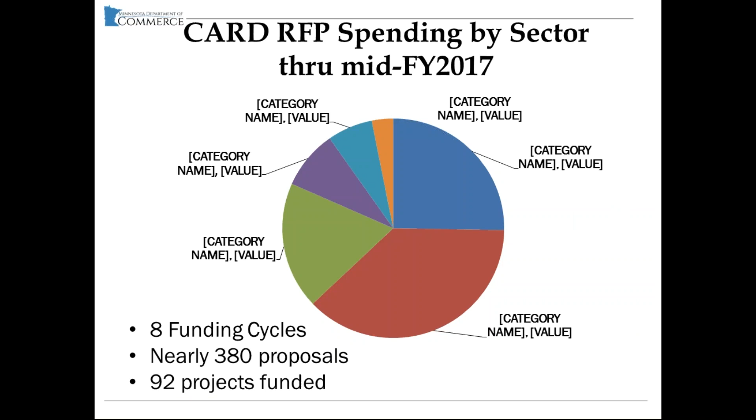With the topic at hand, condensing boilers, for all of us who are excited to do some technical learning, or geeking out as we might like to refer to it, today's topic is on condensing boilers. Condensing boilers are one of the most promising natural gas technologies for reducing commercial energy use in Minnesota. However, many newly installed systems only achieve a fraction of their expected energy savings. Boiler equipment and controls are often based on standard operating conditions, which are different than the conditions needed to perform ideally, and modifications may be needed to achieve optimal performance.

The Center for Energy and Environment recently completed a field study on the impact of actual operating conditions on condensing boiler efficiency in Minnesota commercial buildings. The research identified opportunities for significant savings from temperature control settings and optimization and other low-cost upgrades.

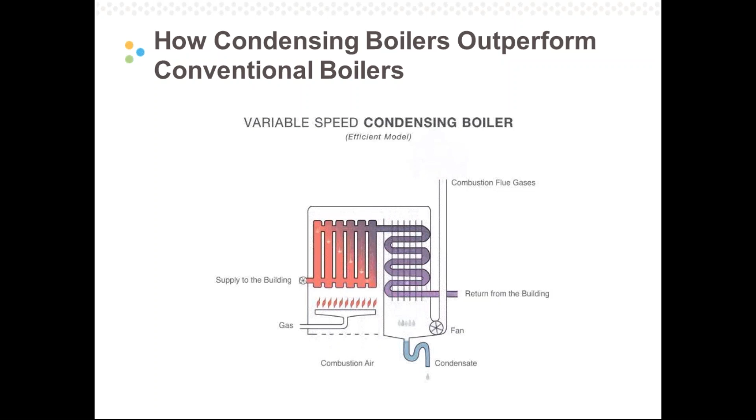There's quite a bit less steam coming out as some of that water vapor is condensed, and the heat from the condensation of that water vapor is captured and then used within the heating system.

So condensing boilers have the benefit of capturing some heat from that steam or hot water vapor, and they don't have the safety factors that cause inefficiencies in conventional boilers.

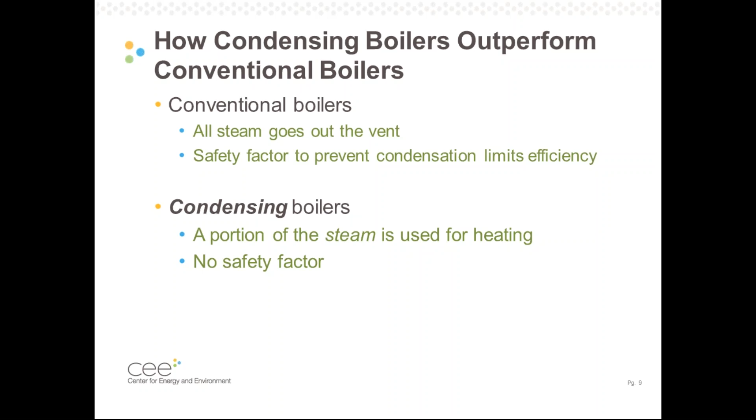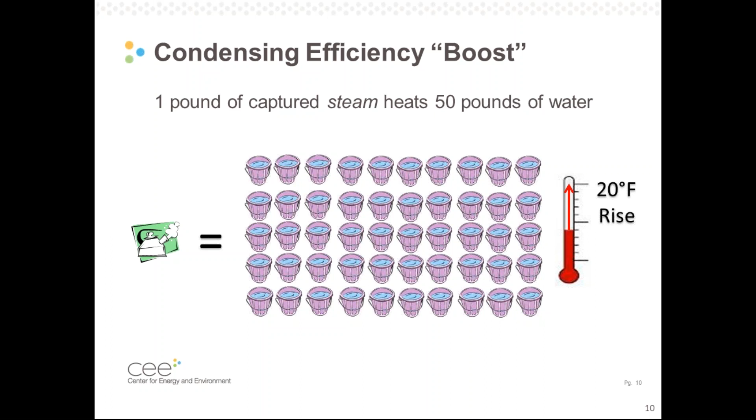Even though that water vapor is not a high volume, it carries a great deal of energy with it. One pound of steam or water vapor that's condensed can heat 50 pounds of water by 20 degrees, and that's in a typical boiler design. They would be heating water by 20 degrees, so you get a lot of bang for your buck in capturing that condensation.

Looking at the benefits of condensing boilers over conventional boilers: a conventional boiler, typically you're not going to get over 81, 82% in terms of operating efficiency, and more typically you're going to be in the 80% range.

The orange here is showing at the top conventional boiler efficiency, and then the next two bars show the range of what could be achieved with a condensing boiler, and what you actually achieve is based a lot on what the operating conditions are within the building.

If you have poor operating conditions for a condensing boiler, you're going to get the minimum savings. You're going to achieve an efficiency of around 86, 87% under any conditions.

Under ideal conditions, you'll get something more like the rated efficiency of the condensing boiler, and that's going to vary from model to model, but it could be up to 96% efficiency or even a little bit more. So in any situation you're getting some savings, but depending on operating conditions, you can get a lot more savings than the minimum.

In terms of what's happening in an actual building, it's kind of a question mark in a lot of cases in terms of what's actually achieved.

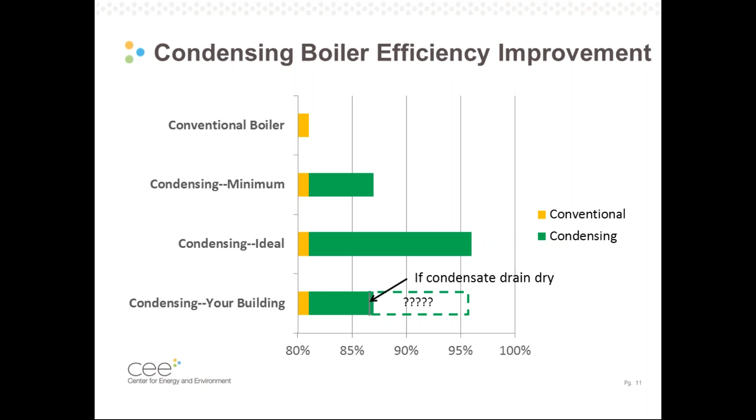I know that there's a lot of utility programs promoting these condensing boilers, and there's been a lot installed, and there's variation in terms of what people are seeing for actual performance and savings.

The most important factor in getting the best performance and energy value out of a condensing boiler, just like in real estate there's 3 rules of value - location, location, location - when it comes to performance of condensing boilers, the 3 most important rules are getting a low return water temperature coming back to the boiler: a low return water temperature, a low return water temperature, and a low return water temperature. It makes a huge difference.

It's not necessarily the temperature going out of the boiler to the building, it's what comes back into the boiler that makes a big difference, so that there's water cool enough to condense the water vapor out of the combustion gases. Kind of like on a hot, humid day, you have a cold can of pop, it will get condensation on it. You have to get it down to a certain temperature to really get that condensation happening.

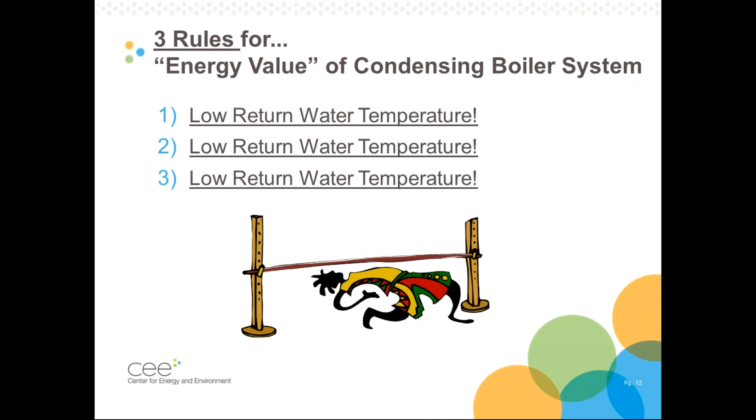This shows an example plot of efficiency ratings for a model of a commercial condensing boiler. You can see for this particular one, they're talking about achieving a 90% efficiency rating under conditions where it can't condense, over on the right. And then as the return water temperature goes down further and further, you get the efficiency going up dramatically.

One thing I also want to point out is that condensing boiler performance is often oversimplified, with people asking just whether it's condensing or not. That's roughly at the 130 to 120 range, which is just on the far right hand side of when it's starting to really ramp up.

So it's not just whether it's condensing or not, it's how much it's condensing that makes a big difference. As it starts to condense, you get a little efficiency gain, but there's still a long range to go that makes a very big difference. It's not just a yes or no question - it's a lot more complex than that, with a lot more energy implications depending on how far you go.

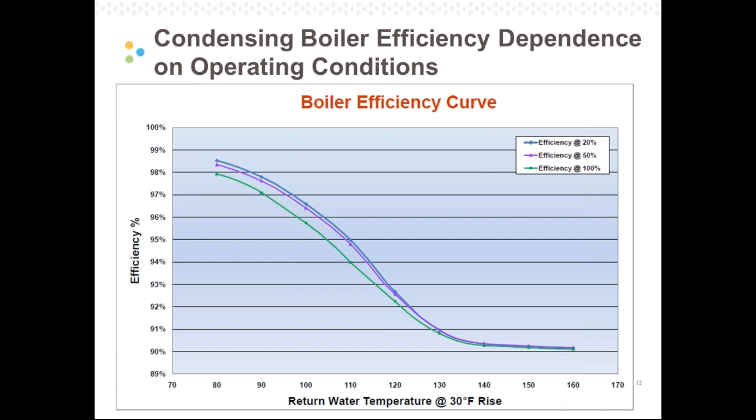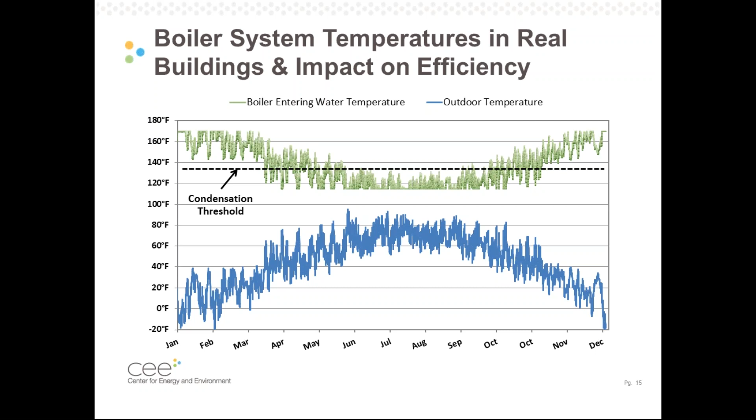This next slide shows how in the design of a system, besides the impact of the building and the system controls on the return water temperature coming back to the boiler, you can also get efficiency benefits by changing the water flow rate in the system.

This is generally done using a variable speed drive on the building loop pumps, not just on the boiler itself. In larger buildings, there tend to be separate pumps for the boiler and separate ones for the building loop. If you're running at a typical flow at design levels with the right design, you might have a return water temperature of 125 in this example.

But with that same system, if you slow down the flow, you actually increase the temperature of the water going out of the boiler - if you look at the right-hand part of that bar labeled low flow, it's actually a warmer temperature coming out. But at low flow, you can have a lower temperature coming back and still get the same amount of heat out of the radiators or air handlers, whatever the heat delivery device is. So you actually get an increase in energy performance by lowering the flow, besides the reduction in pump energy use.

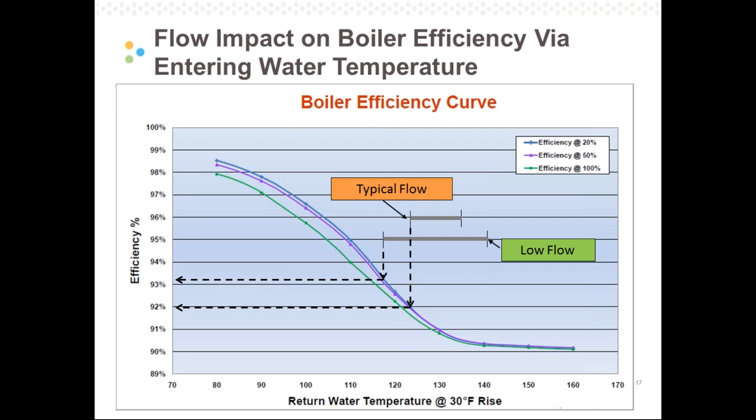Now I'm going to talk about another operating condition factor that can impact boiler efficiency, though not as much as temperature - that's excess air, addressed by a traditional boiler tune-up. That's just adjusting the mixture of natural gas and air to get the right proportions to operate most efficiently without producing carbon monoxide.

This shows one measurement of how well the tuning is, in terms of the amount of excess air. In this example, there's 20% excess air, which is a fairly low value and indicates a pretty well fine-tuned boiler. If the boiler isn't tuned quite as well and you have 30% excess air, you can see that the efficiency level drops.

Drops in this case, even at the same return water temperatures, you end up with a lower efficiency level at the higher excess air, and then that effect is even more dramatic if you have higher excess air.

So you see a significant change with the tuning, and this makes condensing boilers even more sensitive to having correct tuning than conventional boilers, because besides the extra temperature difference, when you have excess air, that extra air gets heated up and goes out the chimney without doing any good.

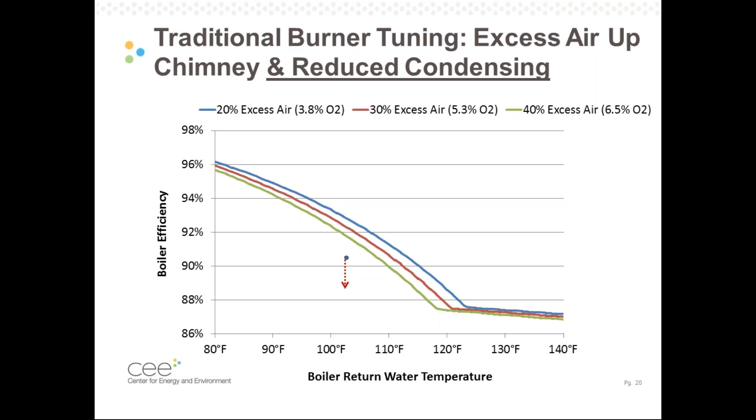Besides that factor of extra heat out the chimney, you're reducing its ability to condense, because the water vapor in the combustion chamber gets diluted by the extra air, and then the dew point goes down. It makes it harder to condense that water out of the vapors.

Now that's given a brief background on some of the key operating conditions that affect condensing boilers. Going to talk about what we specifically did for this project to try to evaluate the impact and the potential for CIP programs to try to increase the impact of what's happening with condensing boilers in Minnesota.

We started out by doing a preliminary market study, talking with local industry contacts to find out what different variations people are seeing in condensing boiler installations, what kind of buildings they're going into, and based on that information, we picked sites for doing detailed monitoring.

In the monitoring analysis, we picked a dozen sites representative of three different commercial building types: education, multifamily buildings, and government or office type buildings. Those seemed to be where condensing boilers were a little bit more prevalent, and we wanted to get a range of conditions and systems.

We also looked at a range of boiler system sizes and other characteristics that vary from building to building. We also did an industry survey towards the end of the project to get feedback on potential program improvements based on our findings, and to get a better sense of what people see as problems in the industry and how things can be improved in terms of condensing boiler performance. And last of all, we have done dissemination.

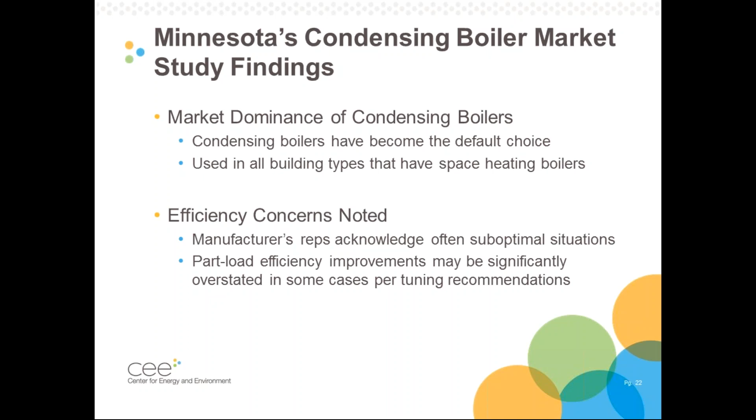Now I'm going to talk a little bit more about our monitoring and analysis and the findings that we had from that. Here's a summary of what we found looking at the boilers.

We'll start out by talking about what a hybrid system is: it's one that has a combination of conventional boilers that are not meant to condense and condensing boilers. That's something you run across both in retrofit and sometimes in new construction situations as a way to save money. In a hybrid, for example in an existing building, you need to replace one or two boilers and not every boiler that's in there.

You might try to leave one in place and control those so that you're getting the efficiency out of the condensing boiler in mild weather, but you're not buying such a big condensing boiler that it has to handle all of the load in winter weather. So then you still use a conventional boiler when the loads are higher in cold weather.

Looking at the tan colored bars at the top, that shows the operating efficiency of the hybrid system combined. The blue bars represent, for each site, the operating efficiency of the condensing boilers, and the lighter colored bars that extend farther out to the right are the rated efficiencies of the condensing boilers. If we focus on the lighter bars at the bottom compared to the dark blue bars, those are where it's just condensing boilers, comparing the rated efficiency to what it's actually operating at based on the operating conditions we observed, and you can see there's a pretty significant difference there.

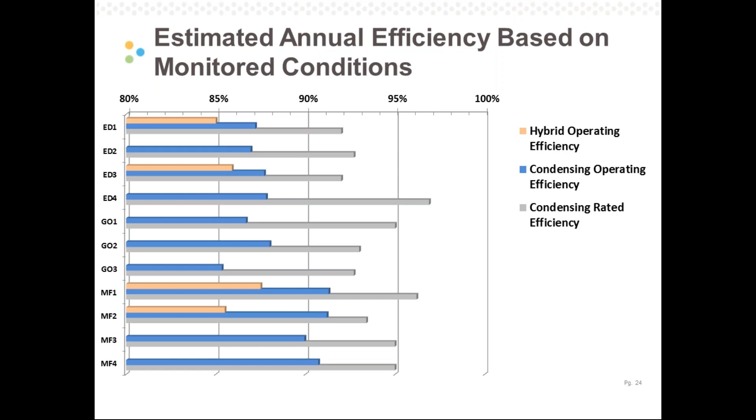And then if you add in the reduction in efficiency from taking into account the hybrid boiler as part of those systems, that can bring it down even substantially further in some cases, or in other cases maybe only a couple percentage points.

This next slide shows a summary of when we looked at what the actual operating conditions were and looked at the systems. We found that there were often opportunities to improve the operating conditions within those existing buildings.

Existing buildings and what equipment is in place can provide a limit on what you can achieve with condensing boiler efficiency, especially if you have radiators, air handlers, or heat exchangers designed for the higher temperatures of a conventional boiler system, and then you put a condensing boiler into that building. You're not going to be able to bring the temperatures down as much as you might ideally want for a condensing boiler system. So that's always going to have a limit on it.

But even given limits like that and other situations, we saw that there were a number of opportunities to cost-effectively improve the operating efficiency of those boilers, with relatively low cost measures in most cases.

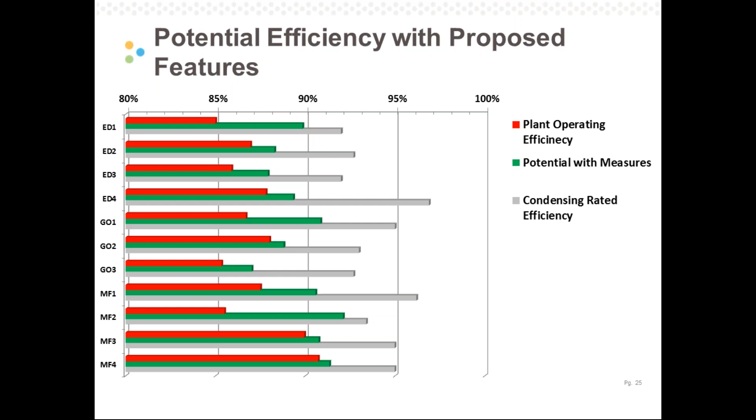These are the kinds of things that could either be done after a boiler has been installed, or ideally at the time that a condensing boiler is being installed. Some of them are cost prohibitive in the case of a system that's already in, but in other cases, some of those same things - especially piping type changes - could be a lot more cost effective to do at the time of installation.

This shows the breakdown of the potential savings for different types of improvements that could be made, and how often these were found to be applicable. In just about every case, we saw potential to be a little bit more aggressive with the outdoor reset control - reducing the boiler water temperature in milder outdoor weather. We saw an average of about 1.5% savings related to that, applying to almost every building. Similarly, boiler tune-up improvements had potential within every building.

Looking at boiler tune-ups, we found that even for boilers operating within the manufacturer's recommended range, there can be big efficiency differences within that operation. If it gets tuned more finely to the lower excess air end of the recommended range, there are significant efficiency improvements that can be made. This varies from manufacturer to manufacturer in terms of how wide that range is and what the potential is. A lot of these boilers where we were recommending tune-ups were already within the operating range, although there certainly were a few that were outside of the recommended range as well.

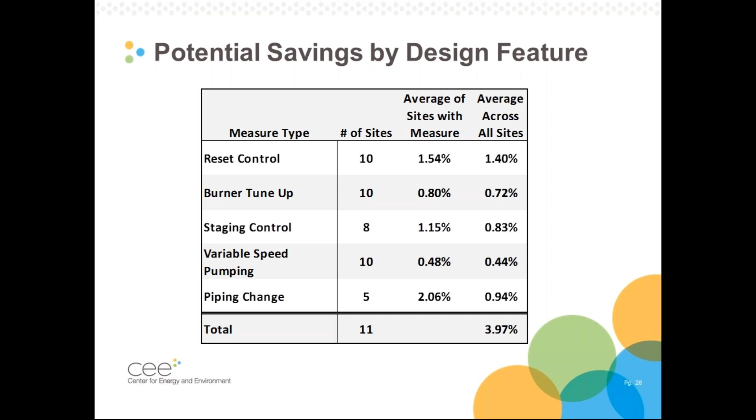That's a fairly expensive fix to change. In other situations where there might already be a variable speed pump in place, there were three-way valves on the air handling equipment, and replacing those with two-way valves would help reduce the flow, whereas with three-way valves you end up having constant flow through the main building loop, so you don't get the same benefits that way.

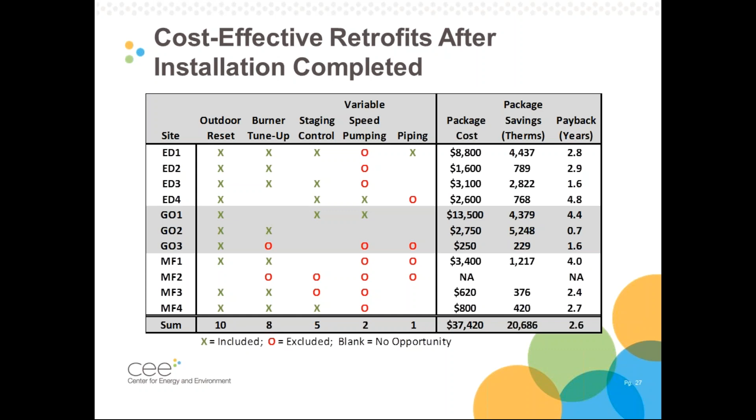Now I'll move on to talking about the results of our industry survey, in which we sent an online survey to a large number of local boiler industry contacts across a range of people who played a range of different roles in the local commercial boiler industry.

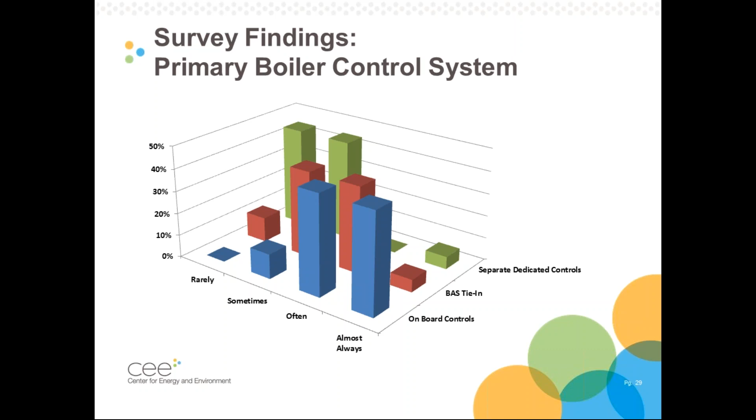And with the building automation system tie-in, there was numerous problems across different sites in terms of not having good communication between the building automation system and the boiler control itself, and how those were coordinated, just causing short cycling in some cases. I think we're kind of fighting each other in terms of what they're trying to accomplish.

Now talking about what the industry professionals saw in terms of witnessed efficiency impacts, what are the problems that they were seeing, and they saw two-thirds reported knowing that there's issues of boiler short cycling, or turning it on and off too frequently.

And nearly two-thirds, 61%, talked about difficulty coordinating control between the building automation system and the boiler itself. And then just under half reported problems with piping arrangements that would circulate water through a boiler that's not running, which is going to cause additional heat loss.

Also, a number of people recognize that the boiler return water temperatures are often higher than they need to be, and kind of both of those last two both kind of address that.

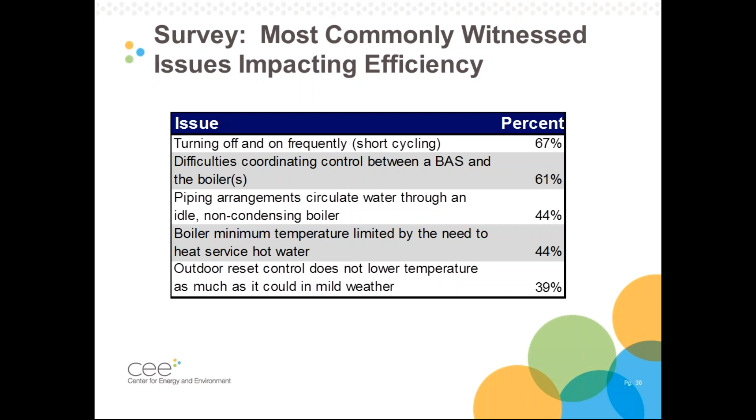And in some of those cases, nearly half the buildings, people talk about 44% of the respondents talked about being aware of systems where the space heating boiler system is tied in with the domestic water heating system or service hot water heating system, and those have different temperature needs. So even in mild weather, when you don't need high temperatures for space heating, you might need high temperatures for adequately heating service hot water. So those can kind of not always be the greatest combination in terms of efficiency benefits.

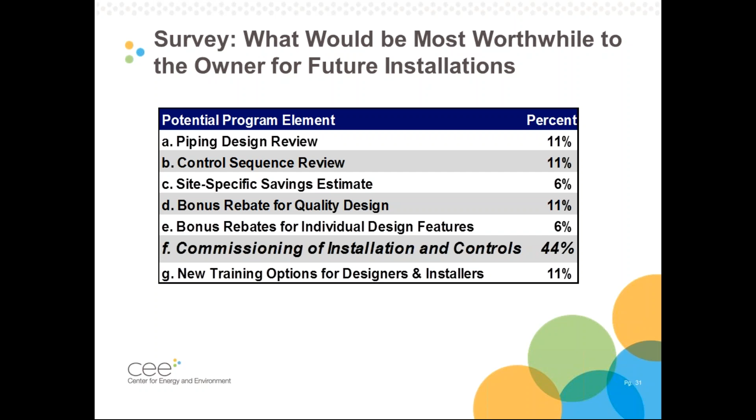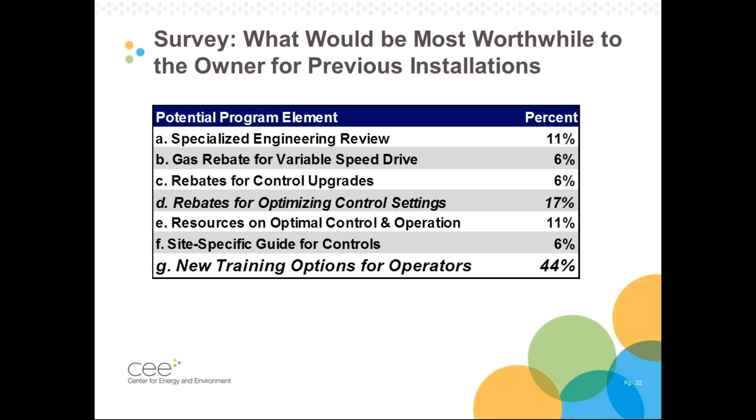And then for dissemination, they have given multiple presentations at local industry events. We also have a final report that has been recently made available that has much greater detail than what we have in the presentation today. And the webinar today is our last thing planned that we have on that.

Now I wanted to focus on the CIP program potential and the relevance of what the findings mean in terms of a CIP program. And the first slide of two really focuses on how CIP programs could go farther in terms of getting energy savings. And on the positive side, we see there's definitely additional savings potential that's possible through a combination of control, piping, pumping, and burner tuning optimization.

And I think this is exciting in terms of that there's the opportunity to add new program features to achieve more savings, either at the time of installation or coming back into a building that already has a condensing boiler in place.

We found that hybrid systems, which had a combination of conventional and condensing boilers, those individual sites tended to have the most potential for savings. So focusing on those could really be a good benefit.